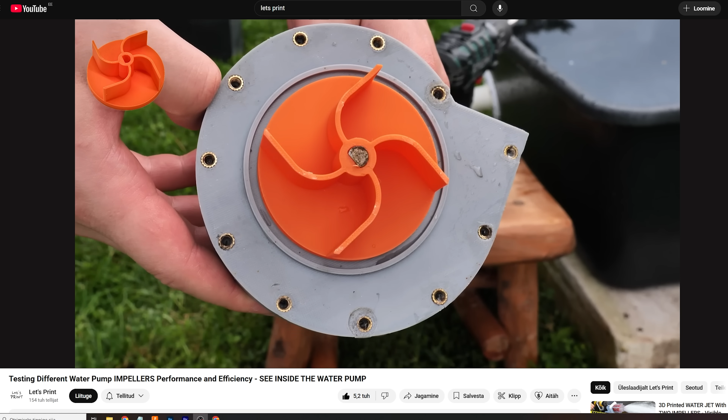We can get rid of them with one really simple but expensive device, which costs around 4 to 5,000 USD. Basically, in front of the lens is one extra disc that rotates at a high RPM. When the disc rotates, all the water drops will fly off by centrifugal force. The working principle is exactly the same as for any centrifugal water pump.

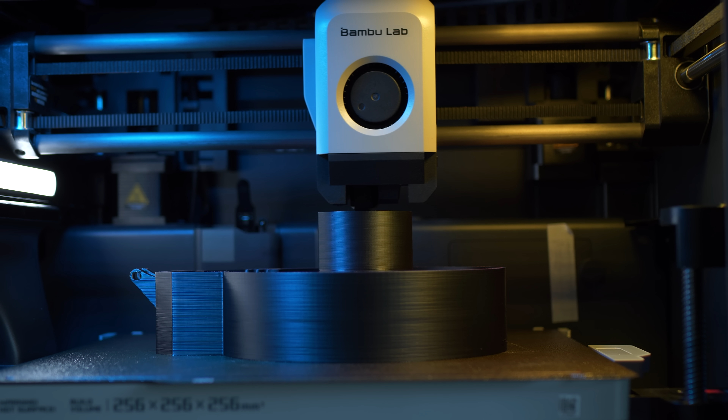We don't see this type of device often, but it's used in police drones, high-end Hollywood movie sets, media helicopters, and those that record WRC rally, for example. So in this video, I will build one with tools and materials that everybody can afford, and solve the issue that I have had many times while recording my videos. Stay tuned and you'll see how I did it and whether my version even works.

Before we go straight into building, let me first show you the design. This is how the water drop deflector will look. This is designed for the GoPro Hero 8, but other versions of GoPro should fit too, because they are all pretty similar in size.

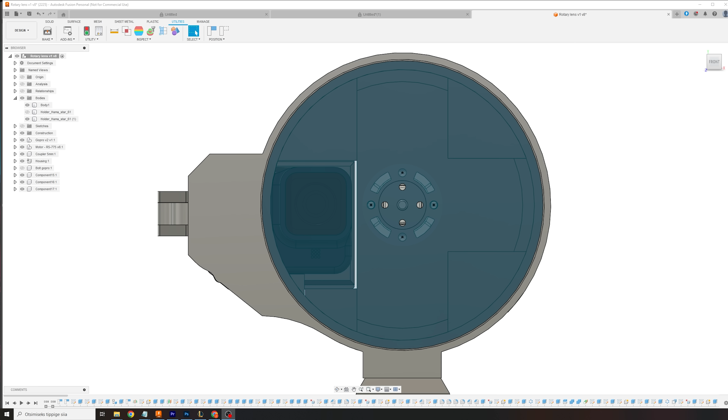Only the outer edge of the disc will cover the GoPro lens, because the centrifugal force is way stronger at the edge than in the center. So it should work more effectively this way. Also, it makes the design way easier.

The disc is driven by a 775 DC motor, because it's so simple to control, and it can spin up to 12,000 RPM, which is more than enough.

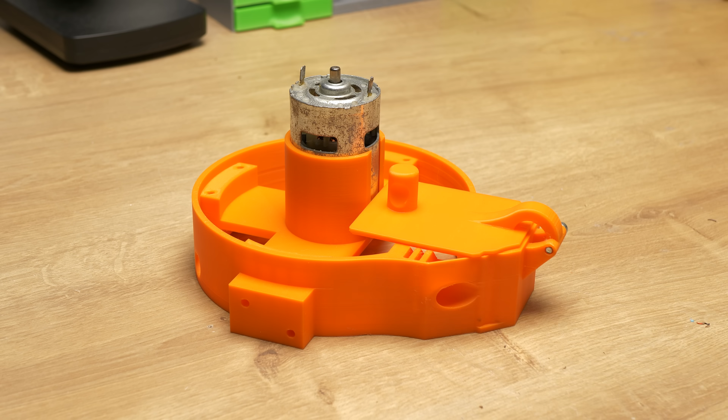When I finished the design, I printed the first prototype with the Bambu Lab P1S using their orange PLA basic. The point of the first prototype is to spot any possible mistakes and fix them before printing the actual thing. And for sure I did make some mistakes. Luckily, they were easy to fix.

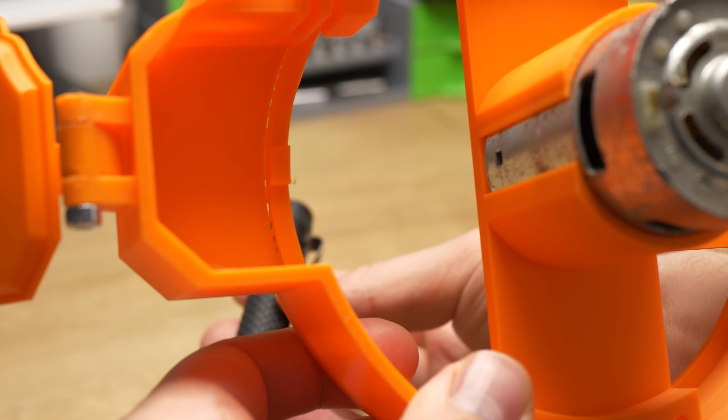First, there was some gap that should not be there at all. It was a 3-second fix. But the second mistake was a big one: the GoPro doesn't fit in.

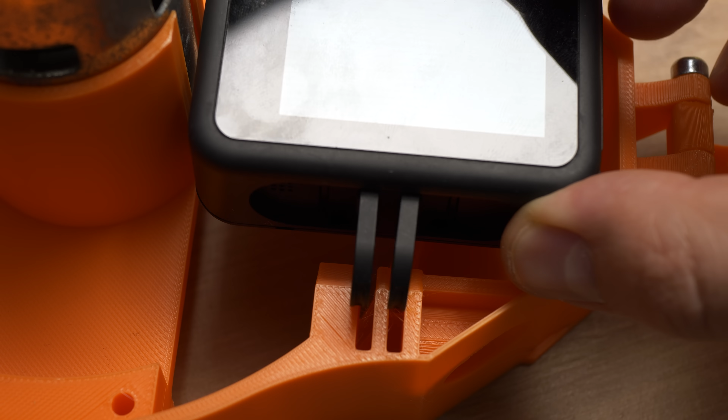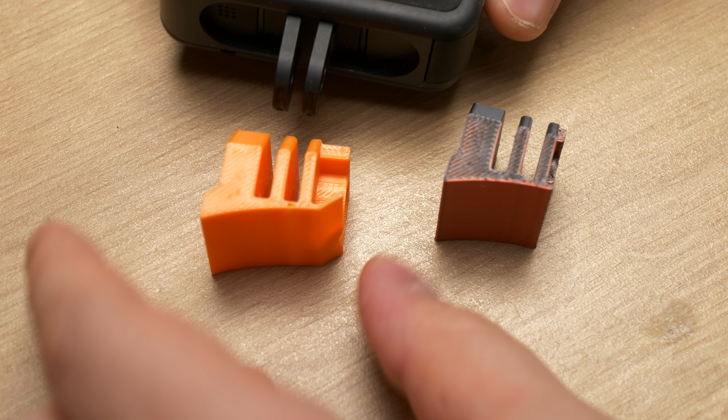When I was designing this, I fully relied on a GoPro 3D model that I downloaded online. This is supposed to be 100% accurate, and for the most part it was. But the one most critical spot, the GoPro legs, was completely off. So I measured them myself, and after 2 tries, I got this fixed.

I didn't have any more errors with my prototype, and I felt comfortable printing the actual thing. For this, I'm using the Bambu Lab P1S.

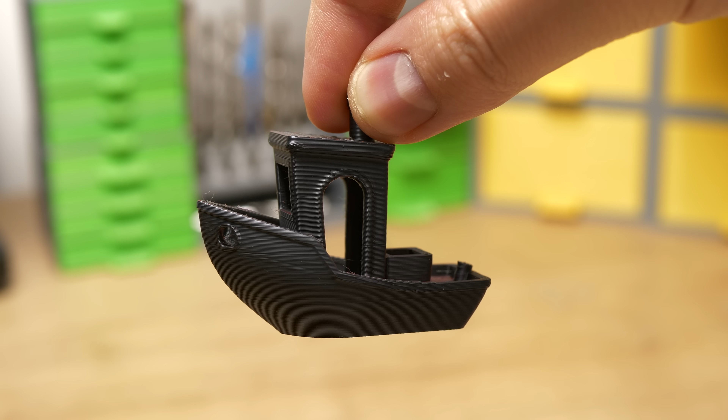And their dual color silk filament. By the way, I chose this filament because it's my absolute favorite one right now and I just want to print everything with it. But anyway, I'm printing with PLA silk dual color.

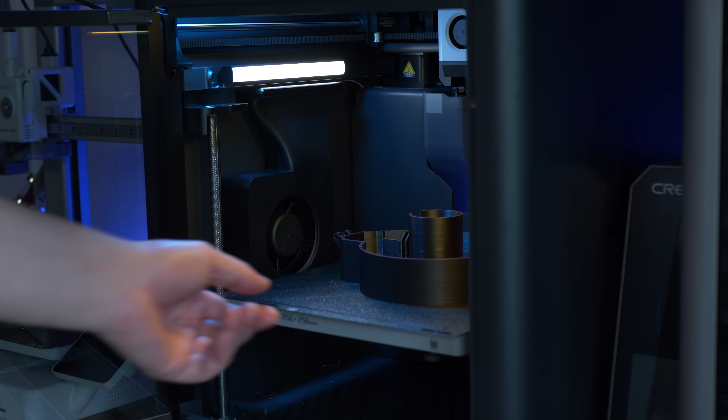Wall thickness is 3 layers and the model requires supports, so I am also using Bambu Lab support material for this one. Well, only the last layer of support actually touches the model. I am doing this because I need a nice and flat surface finish, and using Bambu Lab support filament, it has worked every single time.

Let me just show you. Bambu Lab filaments are freaking strong, and it was hard to break them off. But when I got the majority of the support material away, the last layer just peeled off. And like I said, the surface finish is absolutely amazing. You cannot tell this face was supported with supports.

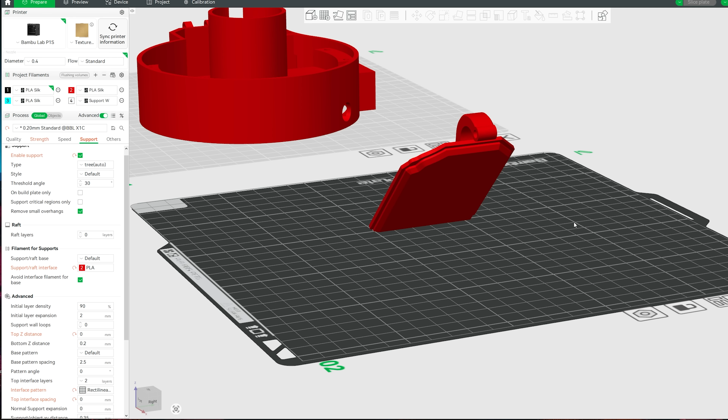But I'm not done printing. I also need to print the door and the lid. I printed the door at a severe angle with a minimal amount of supports. It looks like this print surely failed, but to my surprise, the print finished successfully and the final product looks really nice.

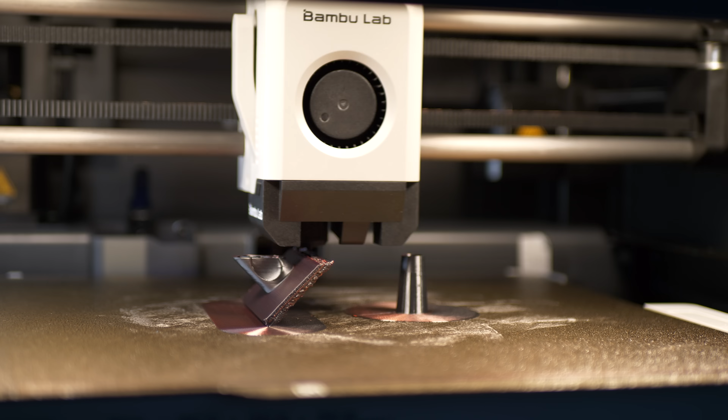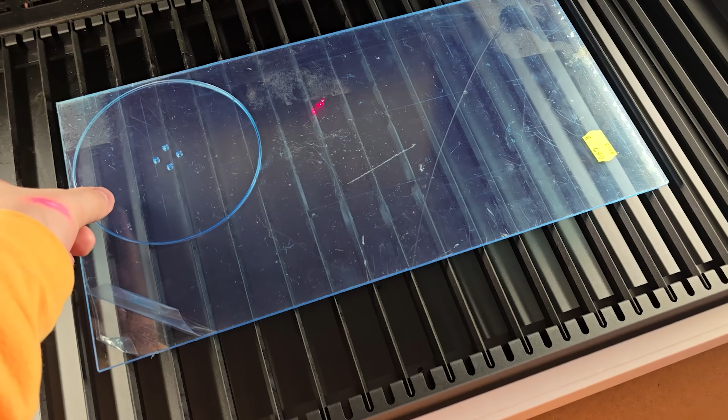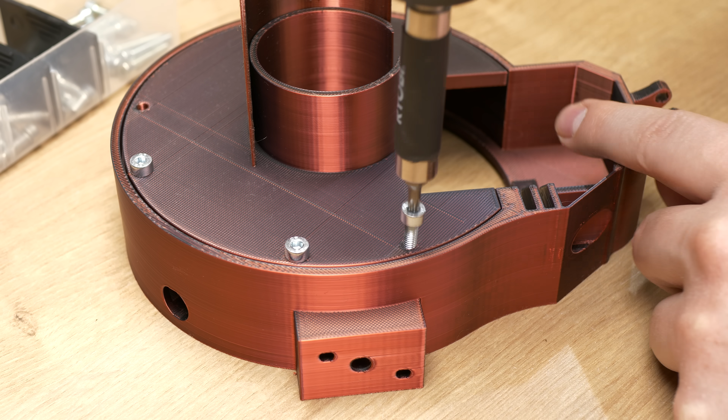Now it's time to start building finally. This process is straightforward: we just need to screw a lot of M4 screws and we are done. The order of assembly can be completely random, it doesn't matter at all what you start with. I decided to first screw on the lid and the door.

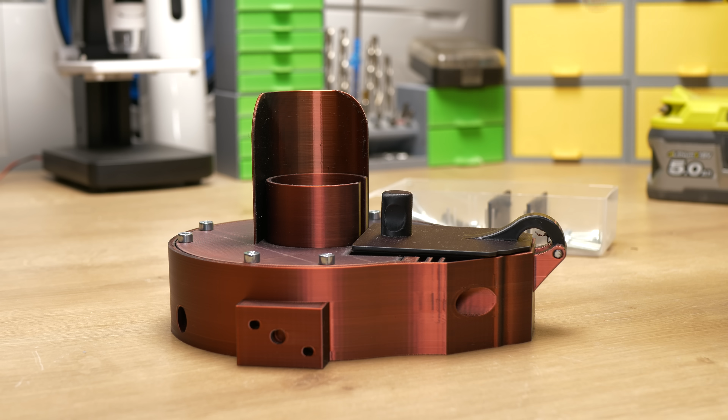Then I used 2 small M4 bolts to attach the 775 DC motor. And for the final step, I had to use 4 M3 bolts to attach the acrylic disc to the coupler, and then the coupler to the motor shaft.

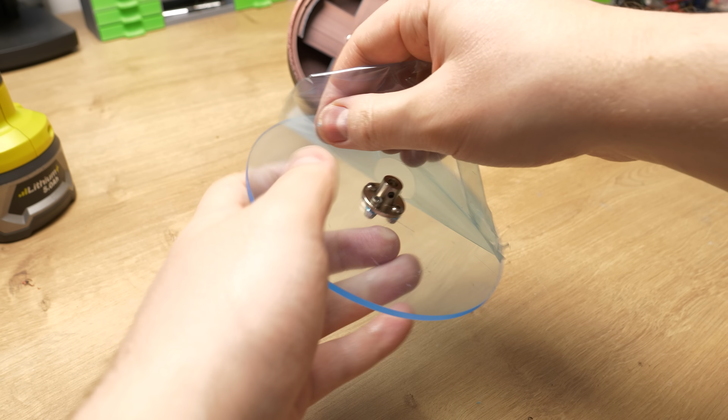It can be a bit difficult to get access to the small set screws, but there is one designed hole for that. Now when all this is done, it should be ready. So let's give it a quick test.

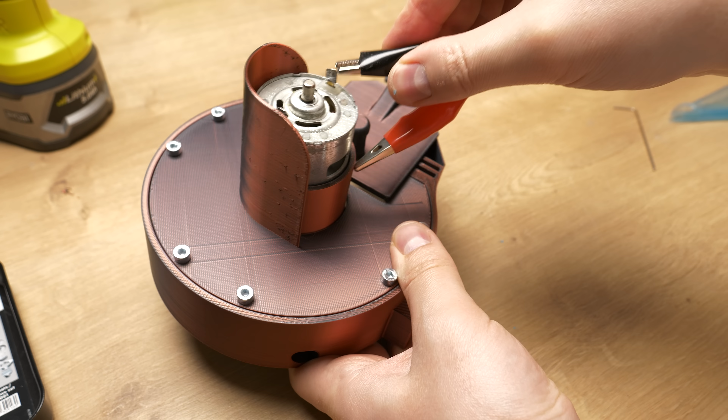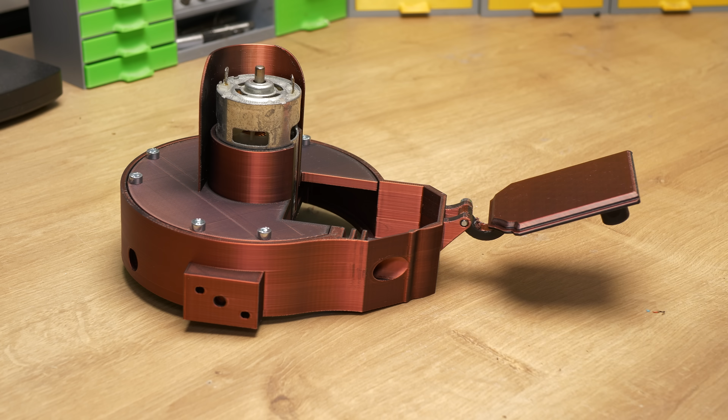It seems to work fine. In low RPM at first I felt some vibration, but I think it was caused by friction. Some spots of the disc touched the housing, but after this little spin, it wore in and I didn't feel this later anymore.

This specific rain deflector is designed for GoPro. This will be pretty much press fit. This holds in there nicely, but for extra safety we can use the GoPro bolt, or however it's called.

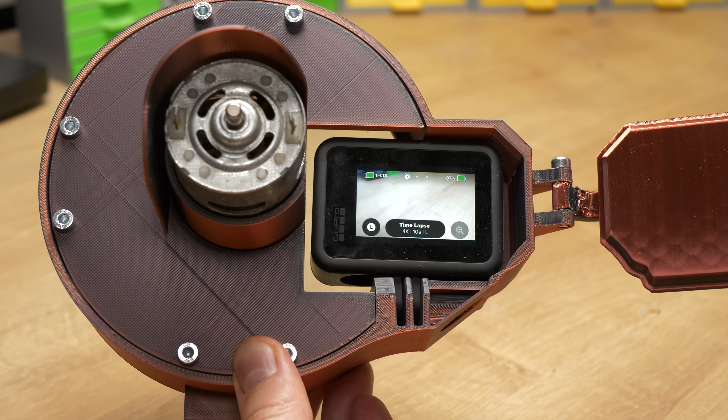When the GoPro is in, there is one issue, and one more issue that looks like an issue, but it's actually not. What the heck is this and that?

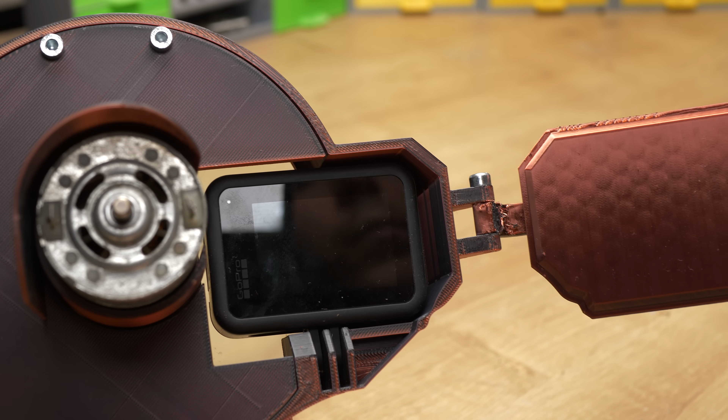The issue is that I don't have access to the GoPro power button. The other issue is that I don't have access to the record button. The last one is not a problem because I can do this: GoPro, start recording. GoPro, stop recording. Or use the app to control the GoPro. Now it's final time to see if this device even works, and if so, how well.

So I strapped my GoPro to the tripod and sprayed some water to simulate rain. Right now I'm not using my device for control. Let's see if we see those water drops that we try to avoid now. It is pretty clear that they are on the lens, and they do disturb the view.

I knew this would happen because these have ruined so much footage while recording my videos. So did we fix the problem? Let's see.

Well, before we can see, I came across a new problem. The GoPro doesn't hear my voice commands. GoPro, start recording. But eventually, I started the recording.

So let's do the same thing, but now with the rotary disc. And to my surprise, it works way better than I expected. The disc is completely clean instantly after I stop spraying.

This is insane. Looking at the GoPro footage, there are no signs of any water drops, but we see severe vibration, so the device is vibrating, and here is room for improvement.